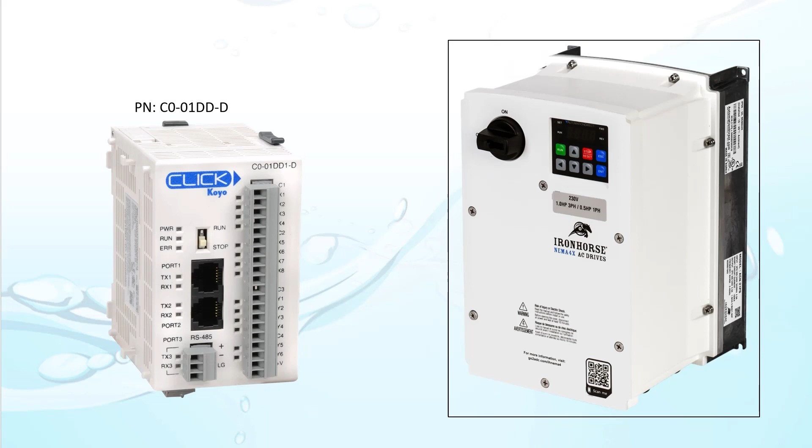Communicating with an ACN drive via Modbus RTU is pretty easy, but there are a few things you need to be aware of. We'll use this Click PLC as the Modbus master. The drive defaults to these COM port settings, so we'll just make the PLC match those.

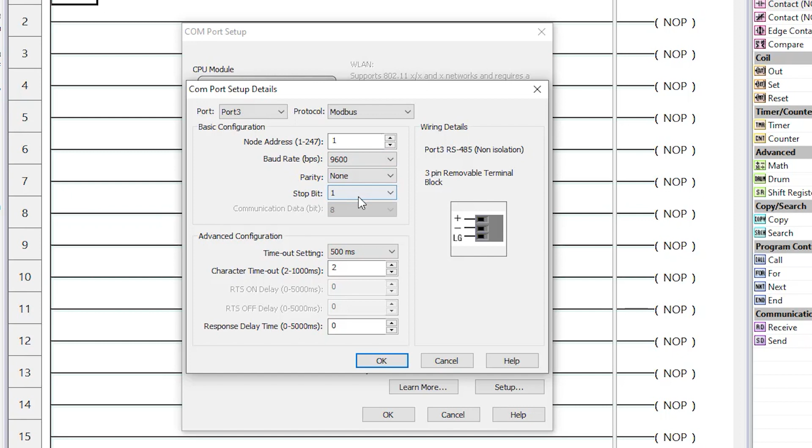To set up the PLC's COM port, we go to Setup, COM port. We'll be using the RS-485 port on the Click PLC, so we click on this button. We're using Modbus protocol, and because this PLC is the master, this needs to be a 1. I'll change the baud rate to match the drive's baud rate, and the drive is at 8 data bits, no parity, 1 stop bit. This stuff is fine, so I'll hit OK. Great. The PLC and the drive's COM ports are both using the same settings now.

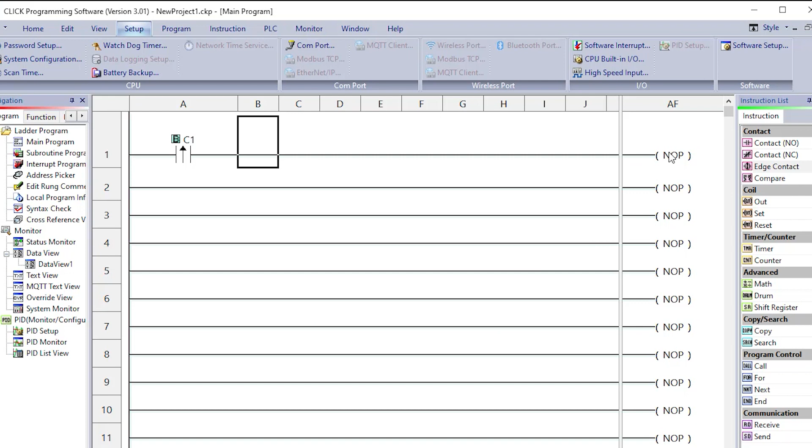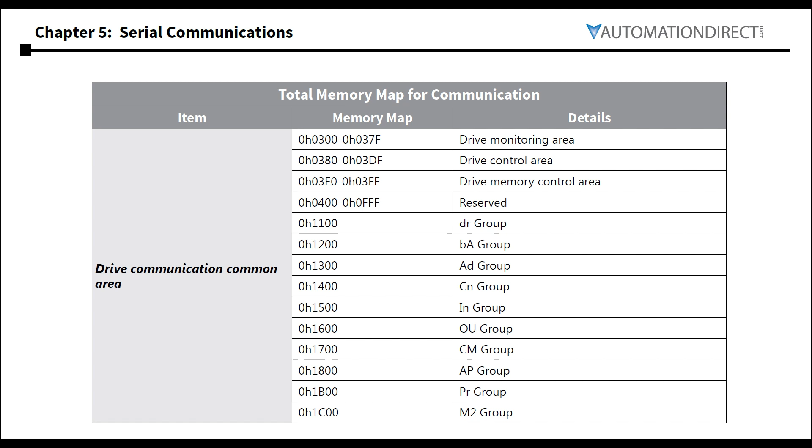We're going to read multiple registers starting at what Modbus address? Well, we just go to the Serial Communications chapter of the user manual, and we see this chart that gives us an overview of the drive's memory map. Now, we could go to the drive's parameters and read each one individually, but that's a waste of communications bandwidth. Instead, look at this. The ACN drives have this drive monitoring area set aside where all the parameters you would normally want to monitor are gathered together in a read-only block of memory.

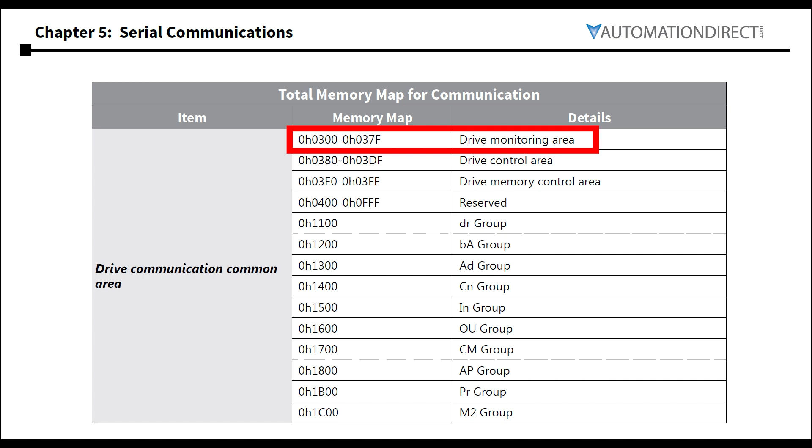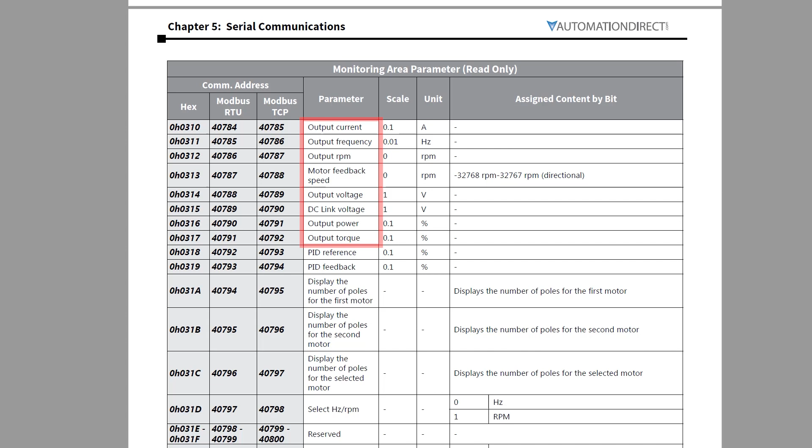If I scroll to that section, we see there's tons and tons of read-only parameters all grouped for easy reading via Modbus. We're going to start here at Modbus address offset 784, where we'll read these 8 consecutive registers. Now, we just need the offset from this 40,000 number because back here in the Click software, we see it uses a 400,000 base address, which means we want to start reading at slave address 400,784.

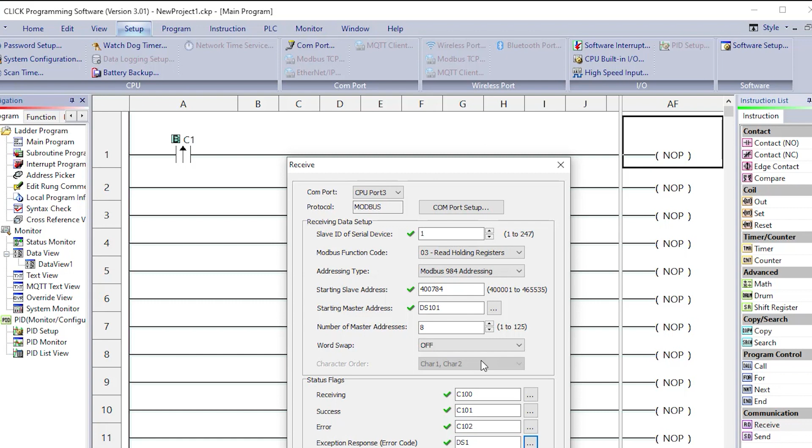Let's put the read values in the memory locations starting at DS101. And we're reading 8 total registers. We could read up to 125 consecutive registers if we wanted to. I'll create some status so we can keep an eye on things, and add the required end instruction. I've already connected to the PLC, so I'll write the program to it.

I created a data view with the read trigger bit and the 8 read values. Enable monitoring. The PLC is running, so let's toggle the Modbus read and see what happens. Now the motor's not running, so everything comes back as 0 except the bus voltage. Exactly what we expect. Let's change the frequency to 10 Hz. Enter to select, enter to accept.

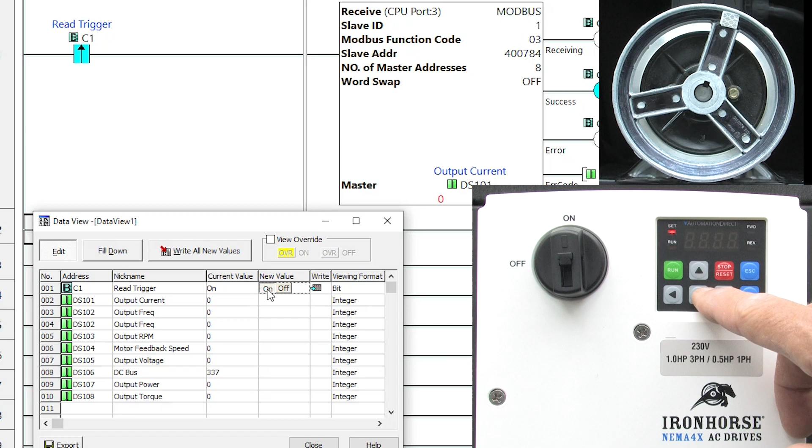Now the drive doesn't default to keypad control, so let's go to the drive command source and change it to a 0, which tells the drive to use the keypad for run-stop control. Enter to select, enter to accept, and escape to the top level frequency display. Now if I hit run on the keypad, we see the drive ramps up to speed. And if I toggle the C1 bit, we see our current is 2.1 amps, the output frequency is 10 Hz, etc.

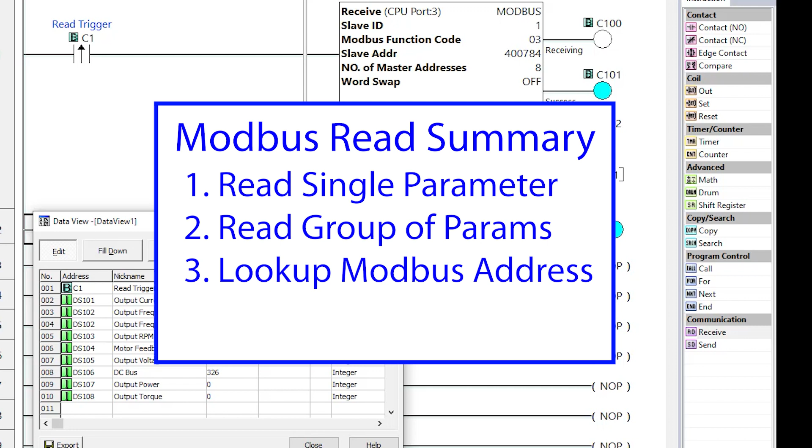Okay, we can read any single parameter or a group of parameters we want from the drive simply by looking up the Modbus address in the user manual. And we also know that all the parameters we might want to monitor are grouped in this convenient parameter monitoring address space, which makes our Modbus communications much more efficient. And I'll press the stop button on the keypad to stop the motor.

Okay, instead of using the keypad to control the drive and set the command frequency, let's use Modbus. First, we need to tell the drive to accept commands via comms and not the keypad. Go to the drive command source and set it to a 3 to tell the drive to accept run-stop commands from comms. Now I can't run the drive from the keypad.

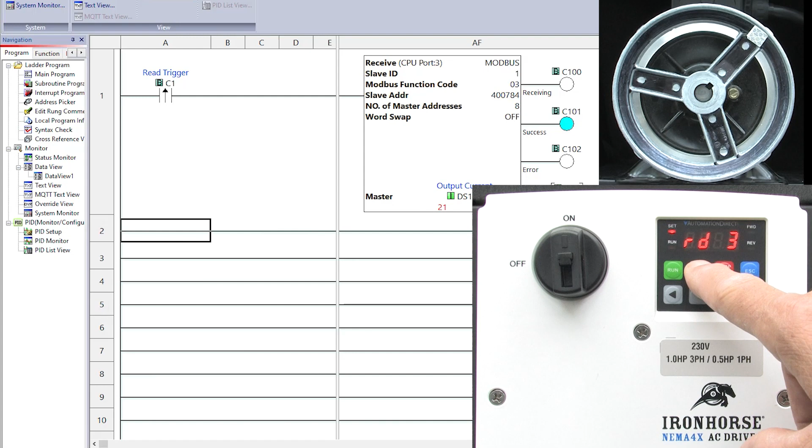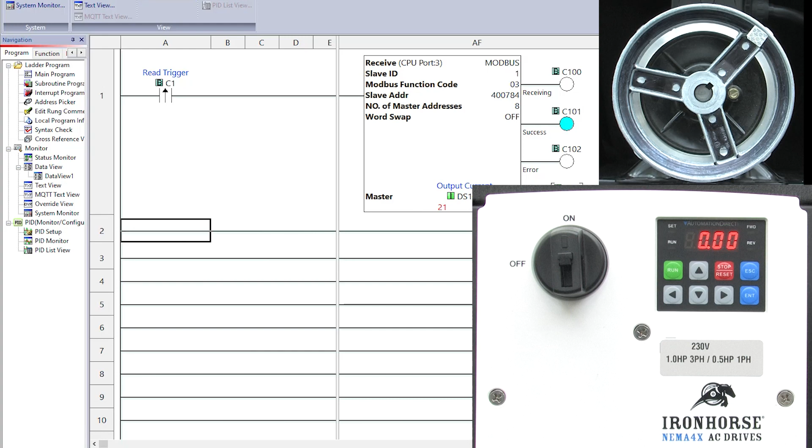And let's go to the frequency source and set it to a 6 to tell it to accept frequency commands from comms. Notice that the command frequency isn't 10 Hz anymore. That's because the drive is now using the comms frequency source memory location. We'll write a frequency value to that via Modbus in just a minute.

Over in the Click software, let's have the rising edge of C10 send on port 3 a Modbus write. And again, we already set that port up, so we don't need to do it again. We want to write to our drive at slave address 1 a single register. Let's have this guy write the command frequency.

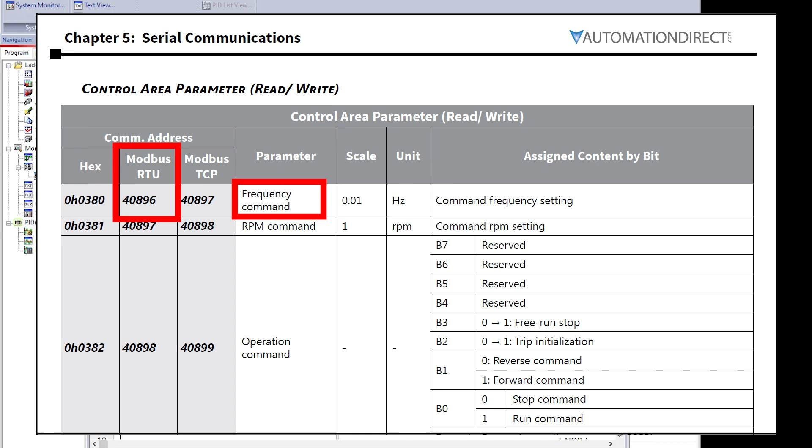In the user manual, we see that's at Modbus address offset 896. So in the Click software, we add that to the 400,000 base, and we put that here. Let's put the command frequency value in register DS110. I'll set up the status for this Modbus write, add an end, and send it to the PLC.

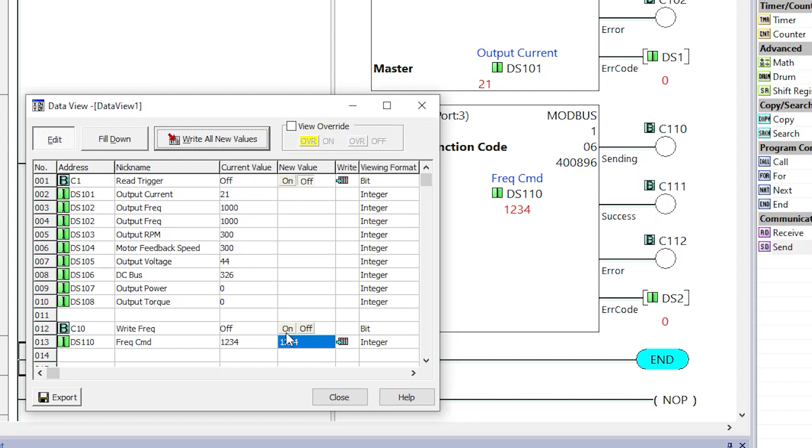I added the frequency write trigger and the frequency value to the data view. Let's change the frequency to something we'll recognize. There's 2 implied decimal points, so that's 12.34 Hz. The PLC is running, so I'll toggle the Modbus write, and we see it was successfully sent, and the new frequency appears on the display. Perfect.

Okay, now let's control the drive from the PLC. On the rising edge of C11, we'll send, on port 3, a Modbus message. Again, we already set up that COM port. And we want to talk to the drive at slave address 1. We'll write a single register to what address?

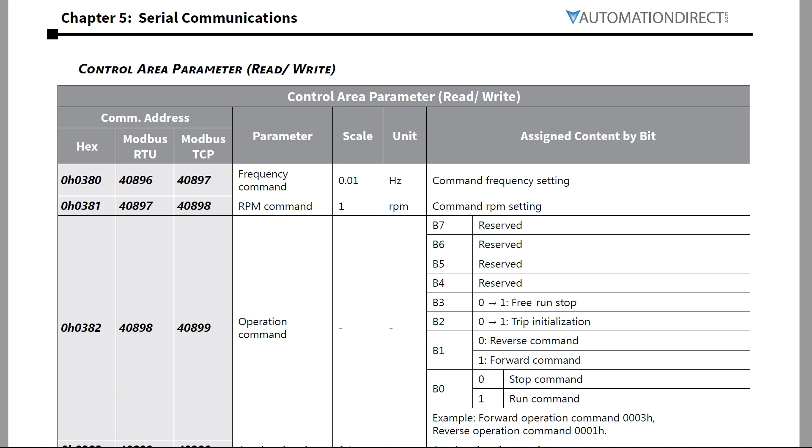Well, back in the user manual, we see Modbus offset 898 controls the forward and reverse and can be used to reset trips and can also set the drive to free spin to a stop. So we put a 400,898 here, and we'll put the drive control word in location DS200. And I'll add some status and add the required end. I'll send that out to the PLC and update the data view.

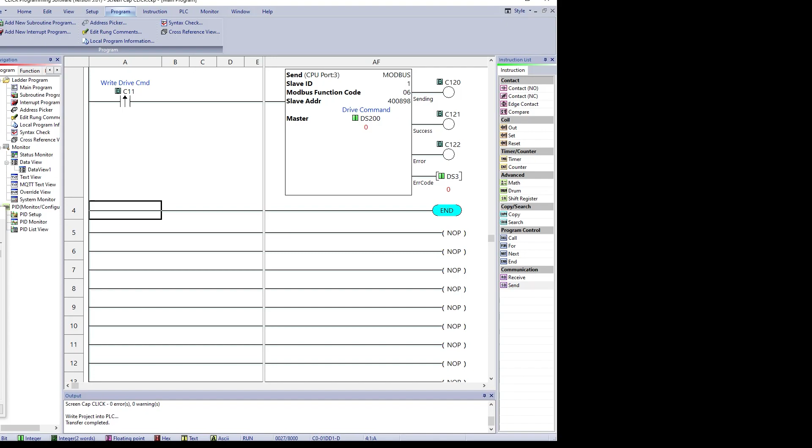Okay, the PLC's running, so to tell it to run in the forward direction, it looks like we need to set the first 2 bits, which means we need our drive control word to be a 3. Toggle the drive control write bit. The command was successful, and we see the motor ramp up to speed. Perfect. To stop the motor, I'll change the drive control word to 0 and retoggle that command. And the motor ramps to 0.

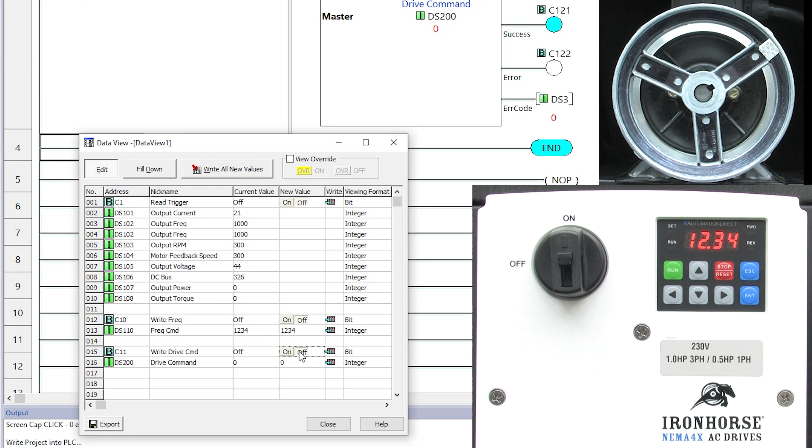Well, that should be enough to get you started with reading and writing to the drive via Modbus RTU. But there are some things you need to know before getting too deep into it. So check out part 2, where we'll cover some tips and tricks and fill in a few holes.